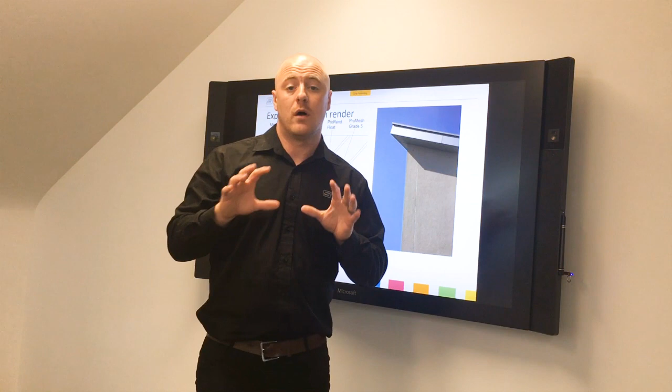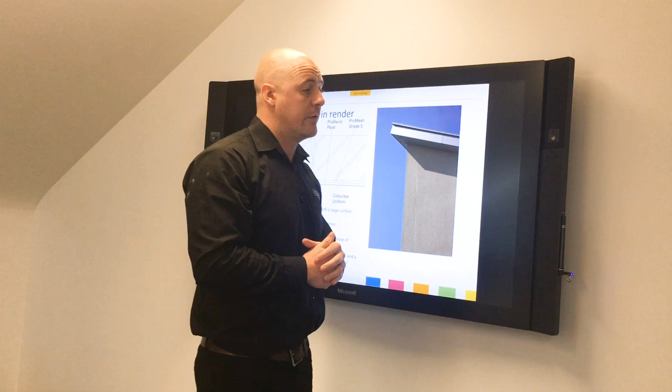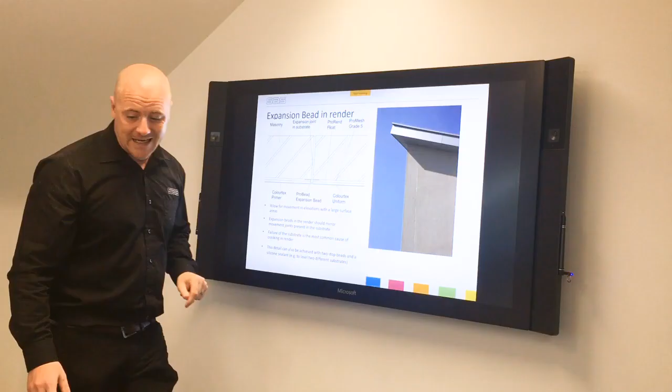So we talk about expansion in render. This is a through wall detail, looking down on the wall, showing our Colourtex Uniform system onto masonry. As you can see, the expansion bead is placed central, usually behind an external masonry skin, you'll see a bit of concrete band and an expansion bead. These are our expansion beads, 3 meters in length, specifically designed to take up lateral movement in an external masonry skin. Mesh is situated in the render, and the placement of these expansion beads is extremely important, and we'll talk a little bit about that later on in this webinar.

So it allows for movement in elevations with large surface areas. Expansion beads in the render should mirror movement joints present in the substrate. Now there is some wiggle room on that - it's not just where the expansion is in the substrate, but the expansion bead can be used just to break the render, and I do get asked that question quite a lot, where there might be a large panel and it'd be easier to break it up as opposed to doing it all at once, because the render might be going off, or it might be too much of a large area for the subcontractors to apply without it curing too quickly. So it can be used as that, or as a detail break.

Failure of the substrate is the most common cause of cracking in the render, and in my experience, I've been working with the company for 7 years. I've seen a lot of cracks in rendered substrates, and nearly 99% of the time I find that it's cracking within the substrate that's emanated through onto the face of the render.

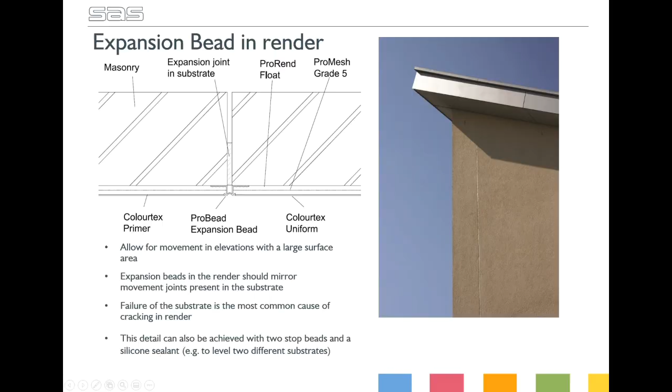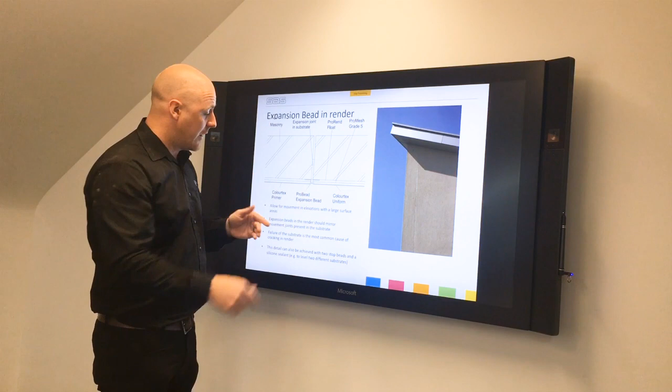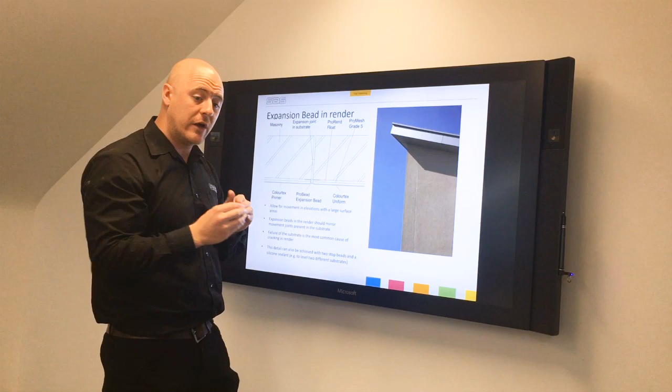This detail can also be achieved with 2 stop beads and a silicone sealant to prevent water ingress. For example, if in this detail you had a masonry substrate on one part and a timber frame substrate with a board system, or they were situated back from one another, you can increase or decrease the thickness with stop beads and render in order for the stop beads to marry up, which is a good way of ensuring there's a flat surface. In some cases, an expansion bead just may not work, so back-to-back stop beads can work just as well.

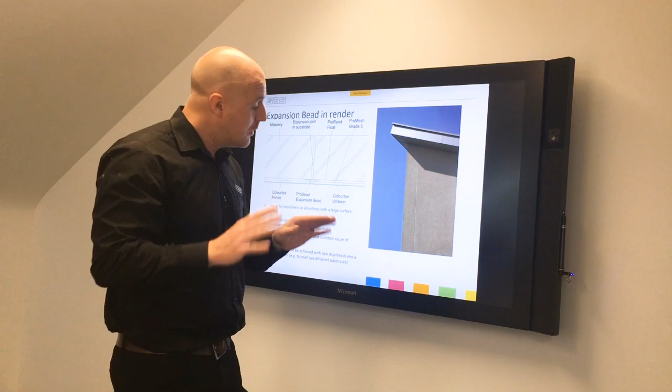Placed over a movement joint present in a substrate to reduce cracking. Use where 2 substrates join to eliminate cracking from differential movement, and we'll discuss differential movement further on. Useful for achieving clean breaks in coloured renders.

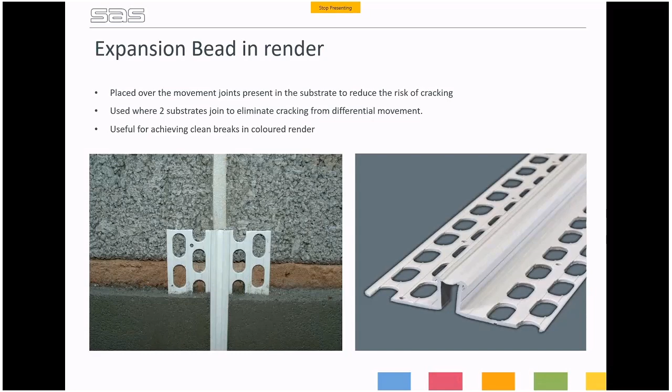This is a picture of our expansion bead. You can see on the bead itself there's a locking point where the render can lock in underneath, and it's keyed on the sides in order for it to really key into the render and prevent any spalling. For example, if you use a monocouche render, there's a nail float that you use to finish it. If you use an expansion bead or a bead which is galvanized, it's liable to rust and also spall once you scrape it back. Ours are 100% UPVC and they're also non-flammable.

For dense concrete block, it's recommended that the expansion bead is placed every 7.5 to 9 metres according to the NHBC standard. Now, that's not set in stone. There are different block types and different manufacturers that produce the blocks, so it's always worth checking with the block manufacturer for expansion bead placement. They'll be able to give you the specification on the blocks, so it's not always what's said in the NHBC standard that's correct. There are different densities of blocks and bricks as well, and that can decrease or increase the expansion placements.

Expect to see expansion bead where a wall changes in height, and that is the big one, regardless of the specification of the block. As you can see in this photo, this wall is about 15 metres long. There was a crack situated further along because they didn't introduce a vertical expansion, and as you can see here, where this parapet wall detail ends and the wall increases in height, there's a crack that runs down there. So this is where the expansion bead should have been situated. This would have saved this particular wall. And also further along, this was...

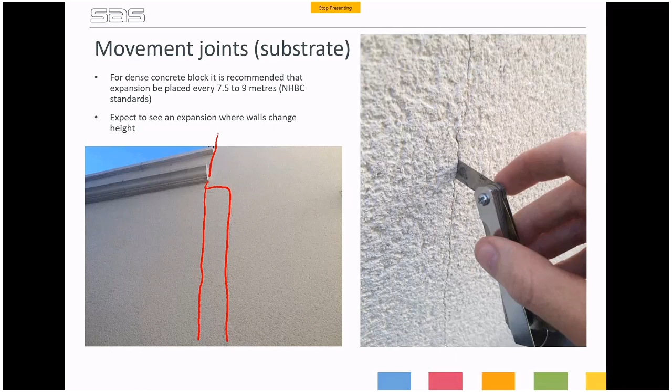...a 7.3 Newton concrete block, so again roughly about 7.5 to 9 metres - there should have been another expansion bead, but there wasn't. The way I always check on site if it's cracked, not only in the render but in the substrate, is I use a feeler gauge, one of my best tools in order to check cracking.

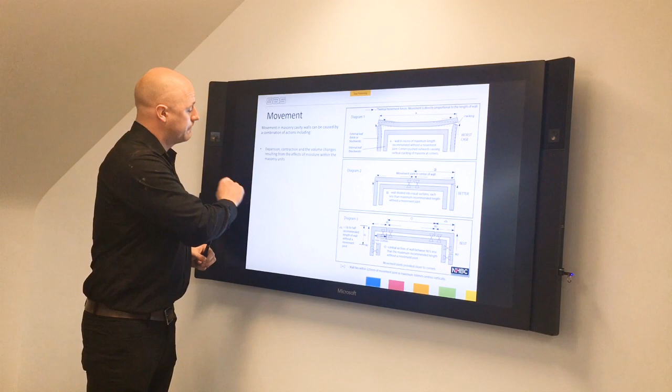Movement in masonry cavity walls can be caused by a combination of actions including expansion, contraction and volume changes resulting from the effects of moisture within the masonry units, and that's a very common one I see. When it comes to blockwork, it's a porous material. It will take on water content when they're stacked on site if they're not covered, and also once they're laid into the masonry skin under inclement weather.

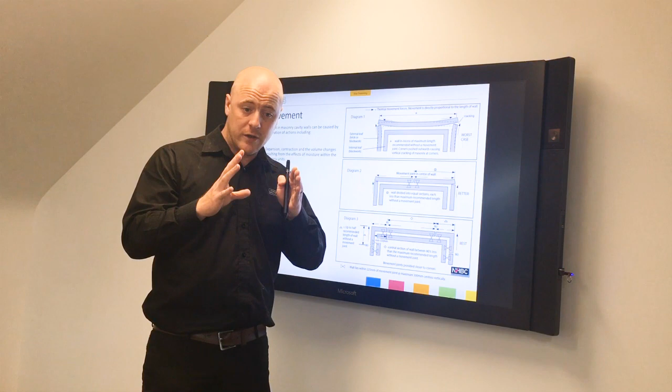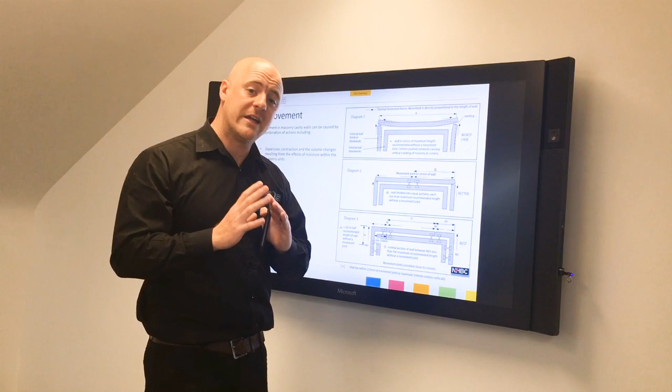They will absorb moisture. Now, if those moisture levels reach 12% moisture content by volume of the block, it must be released prior to rendering. The reason for that is if you render over a saturated block, once the moisture content releases through the render, the blocks will actually decrease in size, and that's called shrinkage. So shrinkage cracks are what I commonly see on rendered elevations.

Temperature variations - mostly you always find that on a southern facing wall, or a wall that gets the most sun, there's higher thermal movement at play because there's much more heat acting on that surface. So under cooling it decreases in size, and it increases in size once it's heated up. That's a lot of thermal movement.

The size and shape of the masonry panels, as well as the distribution of openings and restraints, matters too - the more openings you've got, the more chance of cracking, as it decreases the strength of the overall elevation. Movement joints should be properly constructed to cater for the calculated degree of movement. This is generally undertaken by a structural engineer in the design process.

Let's go back to that slide. Thermal movement and the forces are directly proportional to the length of wall. So this is, say for example, a gable end of a property. There's no expansion in this first detail, so the thermal movement acts on the wall by pushing the external corners out. If there's no expansion bead central, there's a high chance you'll get cracking on these corners. An introduction of an expansion bead central will reduce the risk of cracking on the external corners, but it will not stop it.

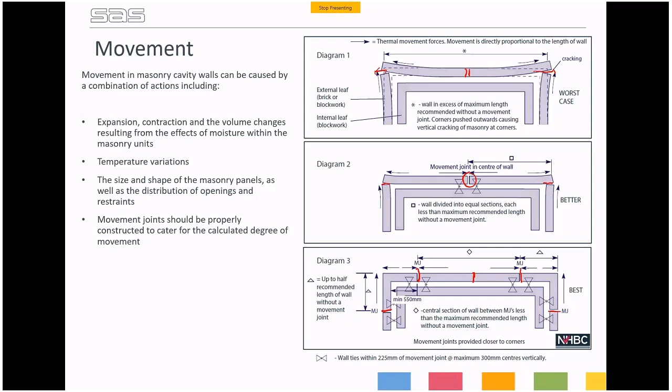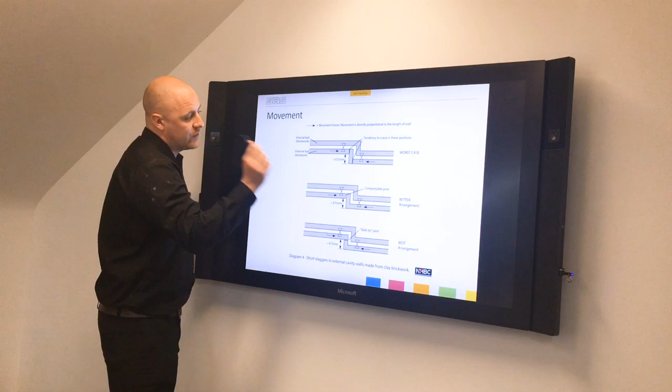Thermal movement forces are proportionate to the length of wall. This is the external leaf, and this is an internal corner. So you've got forces acting on the wall this way and that way. As you can tell from the drawing, you're likely to get a crack here and a crack here if you do not insert an expansion bead detail.

Inserting an expansion bead here with a compressible joint behind is better. But acting this way, if it breaches that compressible joint and expansion detail, there's still a possibility of a crack there. So the best way in this arrangement to actually put the expansion bead in would be at this point here, so the external masonry skin can move in and out of one another without cracking the external render.

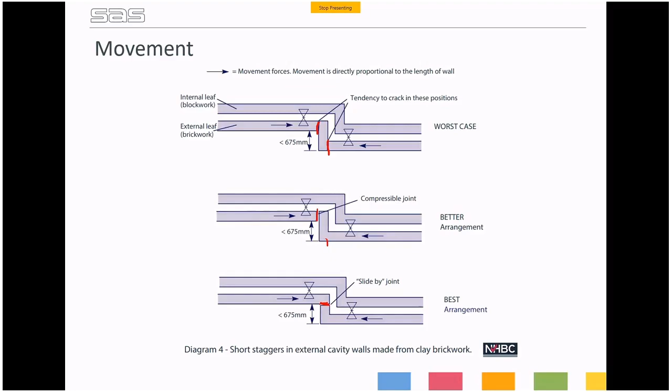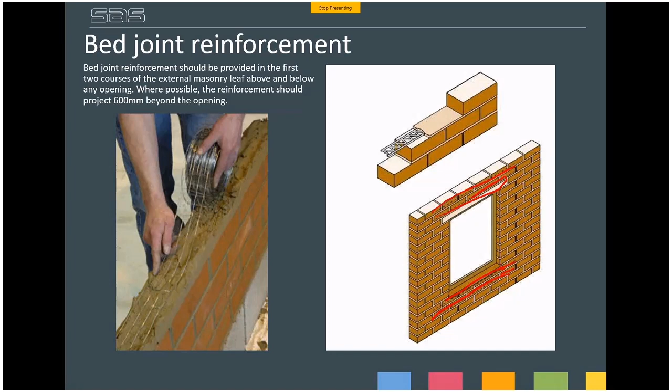Bed joint reinforcement, not only just around the windows but in the external skin of the masonry wall, can also increase your expansion bead placement. So if you put it in every mortar joint, bed joint, every one or two courses, it will increase the strength of the wall and further increase your expansion placement. Again, that would be down to the structural engineer to assess.

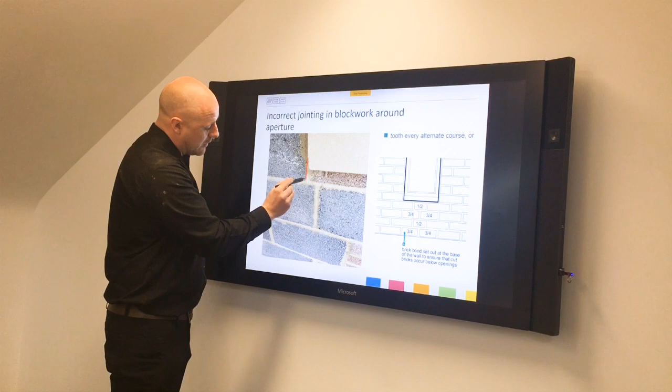Incorrect jointing in blockwork around the aperture. This is a photo I've taken on site. This is the window sill, and you can see that straight joint running right the way down there, and there's a straight joint there. But even prior to any rendering, you can see that is cracked. So if I put render onto that, it will emanate through the render. There's no two ways about it. So this had to be taken out and relaid in order for it to comply with proper jointing.

There should be a block central to the window, and this reveal line should not fall in line with the joint underneath it. Everything should be bonded correctly: half in the middle, two and three-quarters, another half, and two and three-quarters. That's the best way of doing it, and it prevents any cracking around windows.

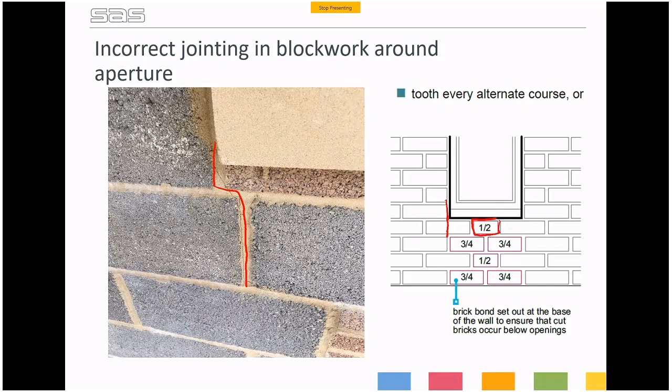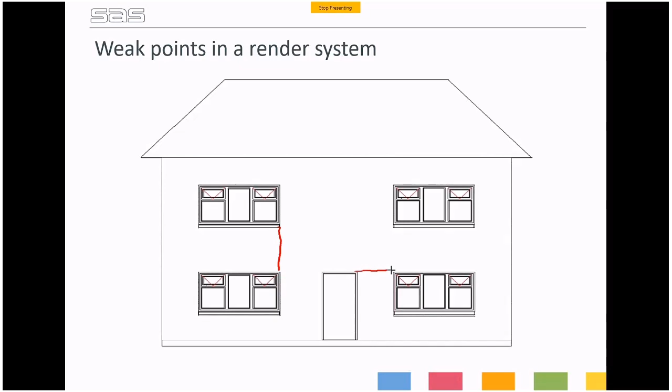Lintel to lintel, you do get a lot of thermal movement with the lintels as well. You do see cracking from there to there, spurring off from the doors. A lot of the time it's because of no bed joint reinforcement.

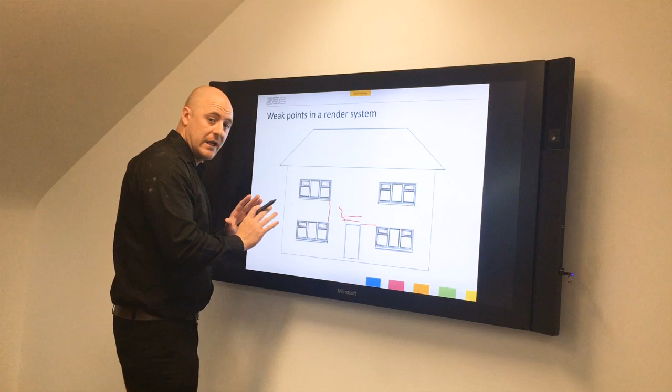With regards to the render, our specification would be to fully mesh the elevation in glass fibre reinforcement mesh, and additionally 300 by 300 minimum patches on all 4 corners. That prevents any cracking that can occur within the render, providing that the masonry substrate has been constructed correctly.

You may also see cracking on the external corners if you don't insert an expansion bead on the external corners, and potentially one central as well. But when inserting expansion beads, it's imperative not to put it over or through any apertures. It must be situated away from the apertures and not be broken.

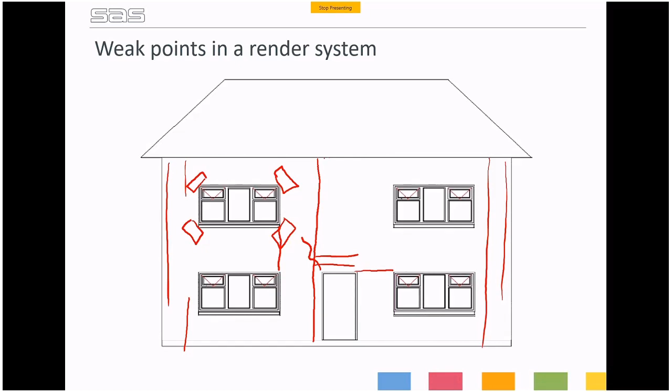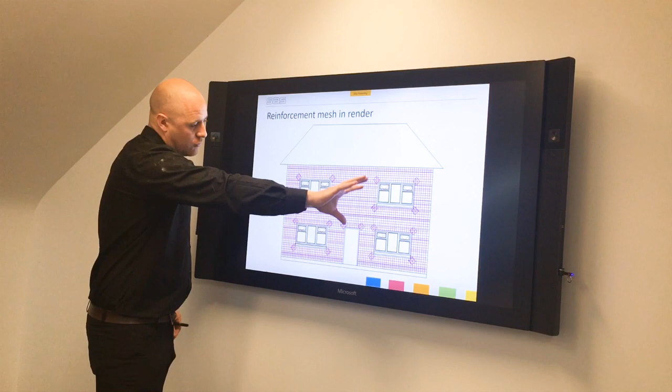Very important. So this is a common detail of what our mesh would be in the substrate. As you can see, the mesh is all running that way. It doesn't matter if it goes vertically or horizontally. The key is to make sure that the mesh is overlapped.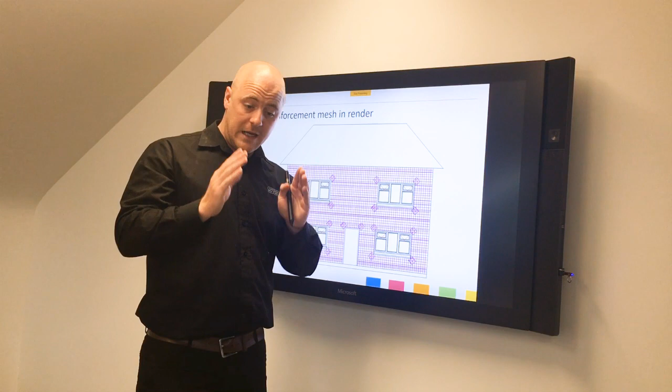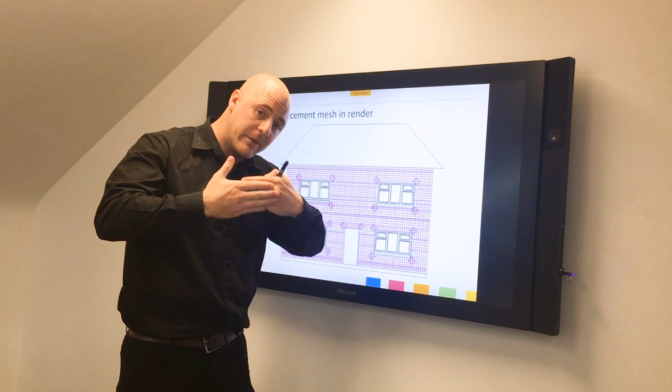Usually what you find on glass fibre reinforcement mesh is there's a 100mm overlap line. If you fail to do the overlap and leave the mesh just adjacent to one another, then under curing it can actually split the render, because it's pulling on the render in 2 different directions. So the overlap is very important. Must be made sure that it's overlapped.

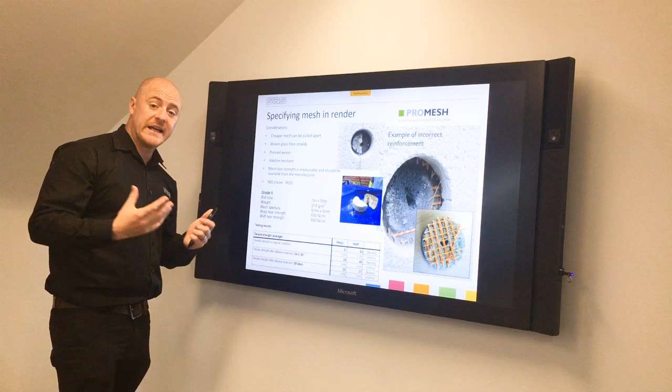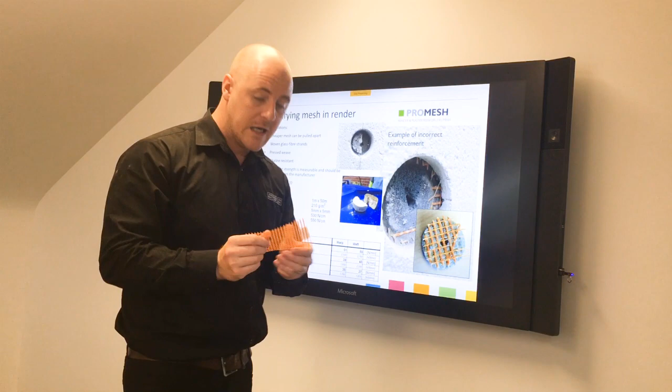So specifying mesh in render - what are the considerations? The cheaper mesh can be pulled apart. This is our grade 5 mesh, for example, the one that we would put in our Cottages system or any render system on a masonry substrate. As you can see with this mesh, it's physically impossible to break that apart. Now, with cheaper meshes on the market, you will find that you can pull apart those apertures in the mesh, which really highlights the fact that it's a cheaper mesh.

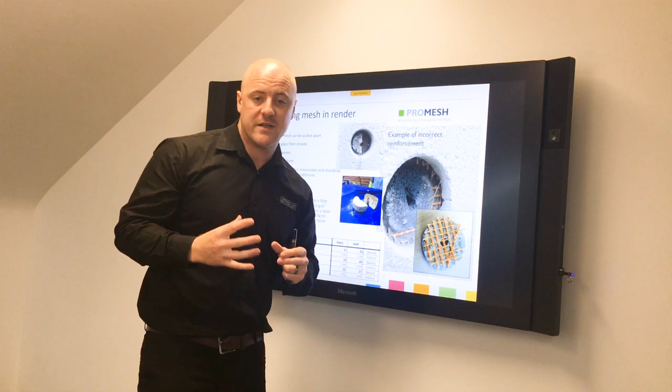It's woven glass fibre strands, pressed, weaved, and this is the big one - alkaline resistant. A cheap mesh you might get on eBay, for example, from China, is very unlikely to have an alkaline resistant coating. Cement contains alkaline, and it's the alkaline that actually breaks down the mesh. So if you use a cheap mesh in the render, which is high in cement content, it's likely that it will break down and cause the cracking issues further down the line.

It might be quick, or it might be a year later. Very difficult to tell, but it will crack it eventually. So using a strong alkaline resistant mesh is what you would need.

Below here, you will see this is our E-tag testing that we've done on our mesh. They laid the mesh in an alkaline solution, like a bath. You can see from the tensile strength in the original condition, the warp and weft strength is 51 and 55 newtons per millimetre. Now, the tensile strength after the alkaline treatment for 24 hours, it only dropped to about 39 warp and 45 weft, which is still very good.

And the tensile strength after the alkaline treatment, after 28 days, so it's been sat in there for a very long time, only went down to 35 to 37. It just highlights the quality of the mesh that we actually put into our render systems. So the mesh tear strength is measurable and should be available from each manufacturer, and you will find it in the NBS clause M20.

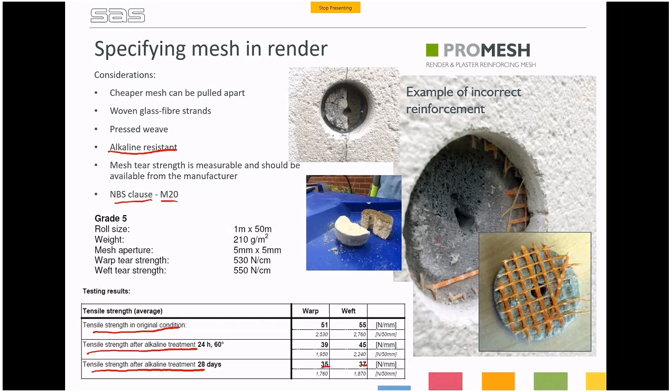Mesh placement is also incredibly important. So we look at these two examples here. Now this is a thermalite block, and you can see that the mesh is placed at the back of the render. That's not actually doing anything to strengthen the render at all - all it's doing is impeding the bond from the render to the wall itself. So it's very important that this mesh should really be situated in the central part of the render to offer its strength.

And obviously in this detail, as you can see in this picture, there is no mesh at all - it's completely null and void of any mesh. But in this picture where I've taken the core sample from, you'll see that there's cracking that runs all the way through the substrate and into the render as well.

Now, I'm not saying for a minute that if it did have mesh in the render, then it would prevent that crack, because ultimately, if there's severe enough cracking in the substrate for any reason - shrinkage, movement, settlement, or a structural issue - the glass fibre mesh is not going to hold the render together, and that's a really important one to bear in mind.

But it may have helped.

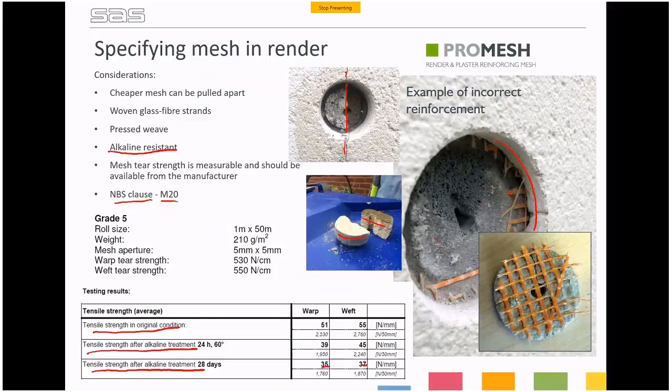Differential movement is if you've got blockwork or brickwork, for example, a brickwork structure with blockwork windows laid in, and you want to render over the top. The issue is that they're two different densities - brickwork being a high density material, and blockwork being a lower density material. So they will move differently to one another.

So what do you do? Not a lot you can do. If you've laid it like that and you render over it with a proprietary base coat, for example, and fully mesh it, you can even additionally put mesh over those areas where the two blocks meet. It still may not prevent the cracking from occurring.

Potentially you could use, in this instance, a board system where you batten it all off and then board it. That would prevent the cracking. But if you're going to render direct, there's a good chance that it would crack.

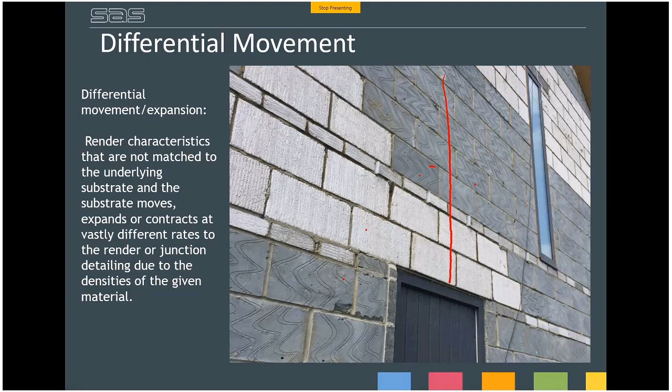Let's talk about hydration cracking. Hydration can affect the render application and curing, and some factors include crazing caused by the render drying out too quickly due to the weather conditions.

Crazing can happen if you apply render onto a thermalite block without a proprietary base coat to control suction. It can also happen if the sun's directly shining on the render for too long, or if drying winds affect it.

Once the render is applied to the wall, it immediately starts to release the water content in the render itself. If it's released too fast under the hydration process, it will craze at the front face of the elevation. It doesn't necessarily mean it's detrimental to the render or its integrity - it just means it's more aesthetically unpleasing.

You'll only find that crazing cracks occur once the render actually experiences inclement weather, because those very fine cracks, less than 1 millimeter in width, will trap water, and you get this crazing effect.

To get over this, generally you can just paint it. But as you'll see in the next couple of slides, overhydration or underhydration of the render can also lead to debonding issues.

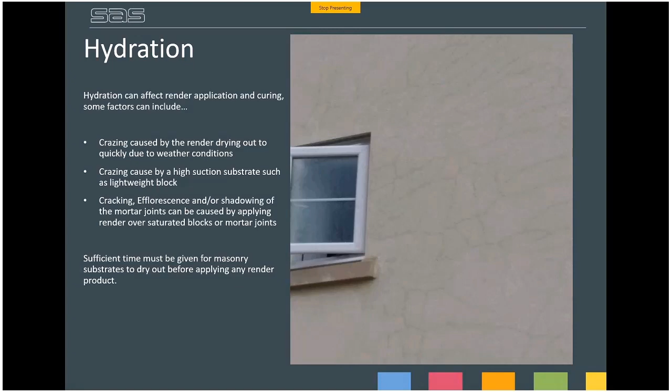Cracking due to insufficient bond. Brickwork is a high density substrate, and it's got a low suction rate. The common density with brickwork is around 1900 to 2100 kilograms per meter cubed.

This means that a pre-treatment would need to be applied prior to rendering. So the more dense something is, like concrete or brickwork, the less it's going to actually adhere or bond to the render itself.

So a proprietary render, we've got one called Prep, which you can apply at 5 mil over the concrete or brickwork first, and let it cure to actually create a key for the following render coat.

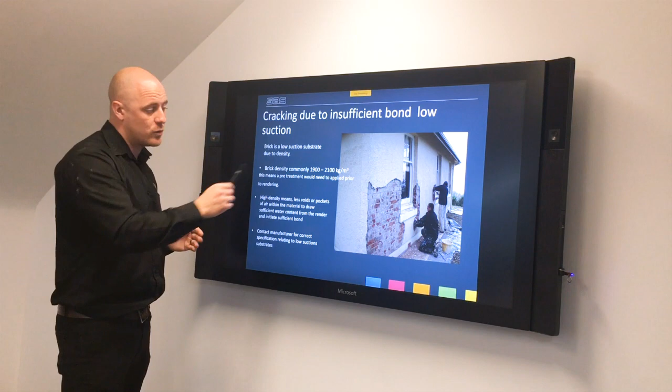So this is what we would specify on a brickwork or concrete substrate. Contact the manufacturer for specifications relating to low suction substrates, of course.

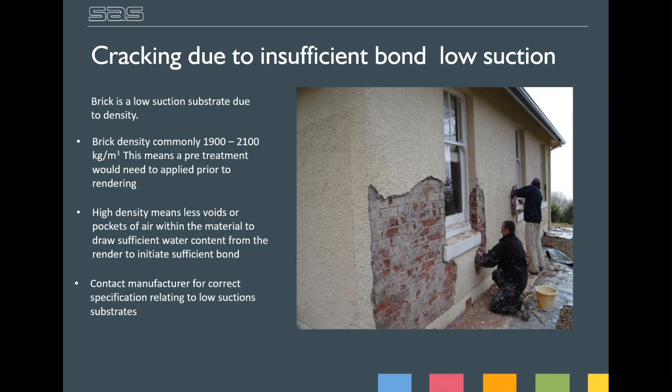Cracking due to insufficient bond on high suction substrates is often caused by hydration issues, where the render cures too quickly, as we discussed previously, resulting in a weak bond to the substrate. Sometimes this hydration issue may only cause slight crazing on the surface, but if it's overhydrated too fast, it can physically create a problem with debonding.

As you can see in this photo, this is a thermalite block with a sand and cement render, and the overhydration of the render has actually caused it to release from the substrate itself. It's very likely they didn't use an SBR or any proprietary suction control. The aircrete blocks have a density of roughly 400 to 900 kilograms per meter cubed, meaning there are more pockets of air or voids in the material that draw too much water from the render, both inside and outside, which again affects the bond.

That's one of the main problems when applying render - incorrect specification of material use, applied again to an insufficient depth.

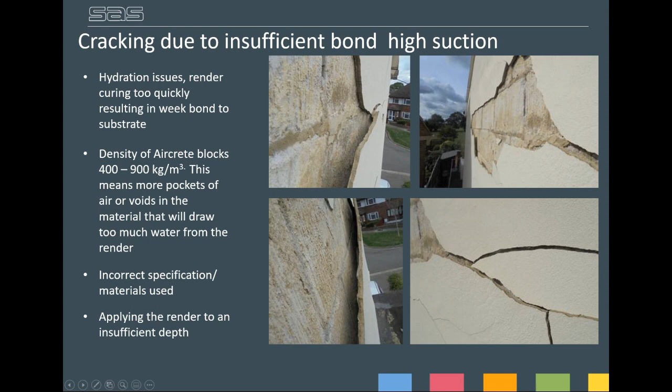This is a case study of Bellevue Cottages in Bristol, which I undertook for the NHBC. This is a metal lath system with a sand and cement render. With the lath system, you'll see that it's battened off, with building paper and mesh lath. Now the issue with lath, and on timber, is that timber frame is a hygroscopic material.

It will take on water and release water in different environments. So if you apply a render to the lath system which is high in cement content - which sand and cement is - and not flexible, with no polymers allowing for flexibility, you will have cracking that occurs because the frame will move. That's what you can see in this particular instance - cracking from the windows here, running all the way down.

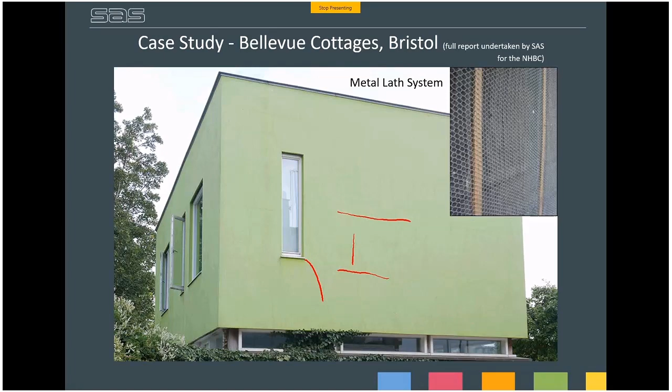So this all has to be removed in order for it to be rectified. For this, we used our Pro Wall system. This is a through-section detail of the actual lath system. You can see the building paper down here and here, and you get your metal lath here, and this is your sand and cement product.

This is the original paint, which is a lime green, as you can see on the surface. Now what they've done, rather than remove the system and put a correct one on, is used another flexible render over the top with a glass fiber mesh embedded into it, hoping that would cure it, but it hasn't. The cracking and movement of the timber frame came through onto the face of the flexible render as well.

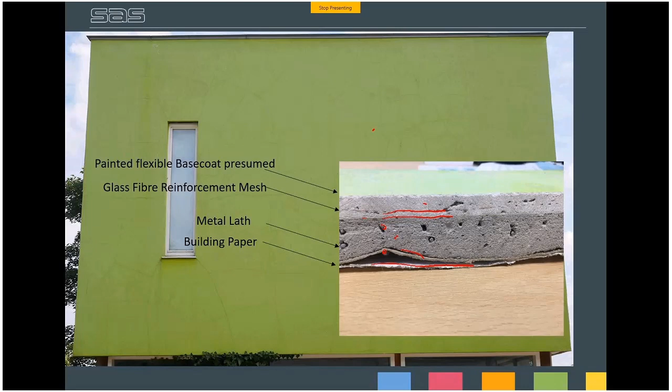So with regards to specification for timber frame, it's always best to contact the manufacturer and get some idea of what they can use on a timber frame. We recommend a board system. Now, onto cracking in timber frame.

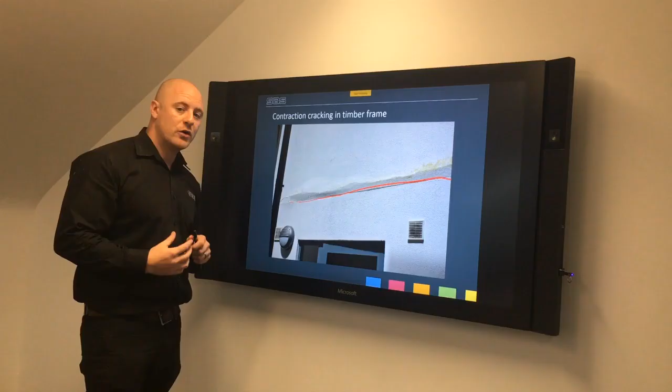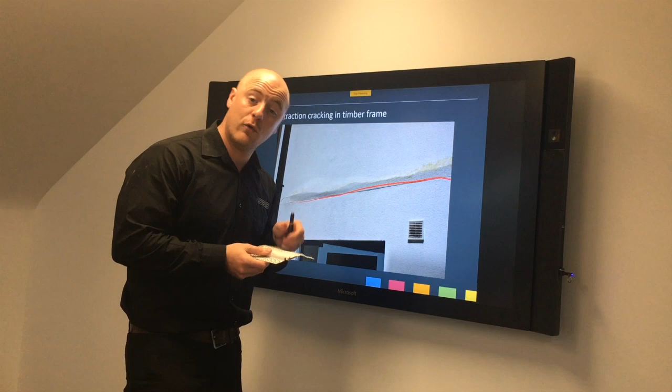As you can see here, this is a floor joist zone or rim beam. At the rim beam area, you will require something called a slip joint. A slip joint is put central to the rim beam area, and it helps with shrinkage or contraction that happens naturally at floor level in a timber frame - I'll explain why in a minute.

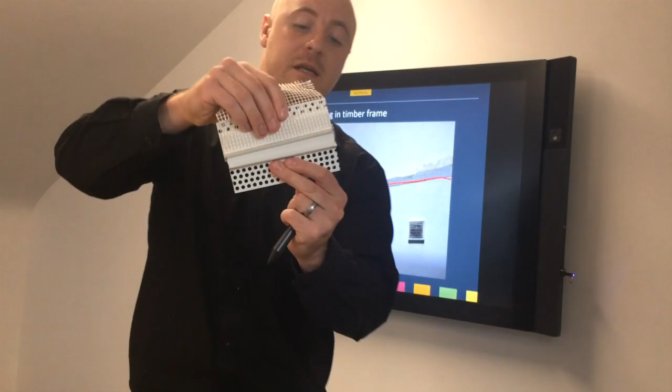With this slip joint detail, I'll come closer to the camera - there's movement in the bead itself. Now, as you can see in this one, this hasn't happened. This is a back-to-back stop bead, which shouldn't work in this case, and it hasn't. The contraction has happened within the frame, and it's cracked ultimately.

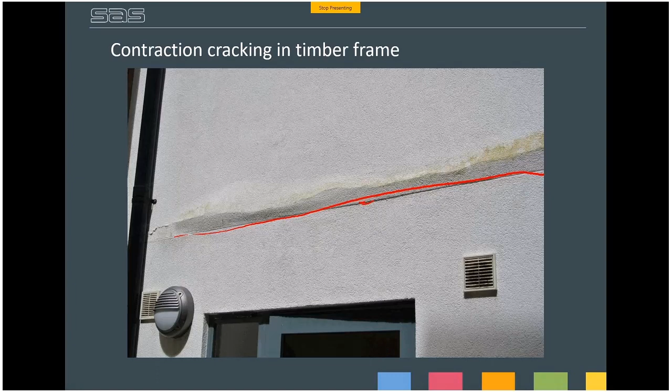And this is another picture which shows it very well. You can see all the floor levels here, and you've got cracking. Now this is a timber frame board system, and they obviously didn't apply it to specification, and that's the end result.

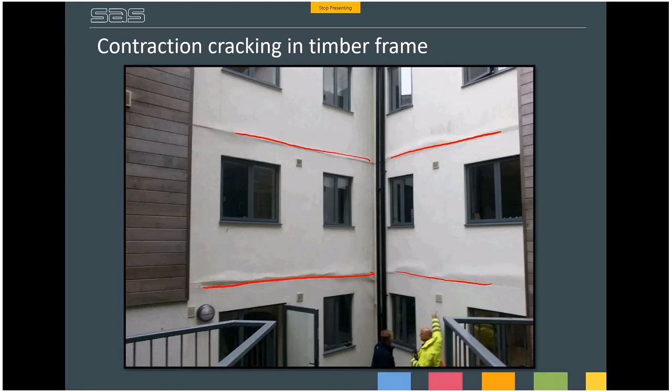So why does it move? The rim board area, or the floor plate, usually has a makeup of timber, all stacked horizontally, and those timbers have moisture content within them. As more people live in the timber frame structure and warm it up, the moisture content in the capillaries of these cross-grain timbers releases, causing cross-grain contraction that pulls down and shrinks these timbers.

So this is why you need the slip joint detail on the outside of the system. That actually saves it. What happens with the battens is they sail over that area and they're not screwed into the rim beam, and the board system is screwed to the battens itself. That prevents any cracking within a render system on a timber frame. It's very important, so they will go in at every floor zone.

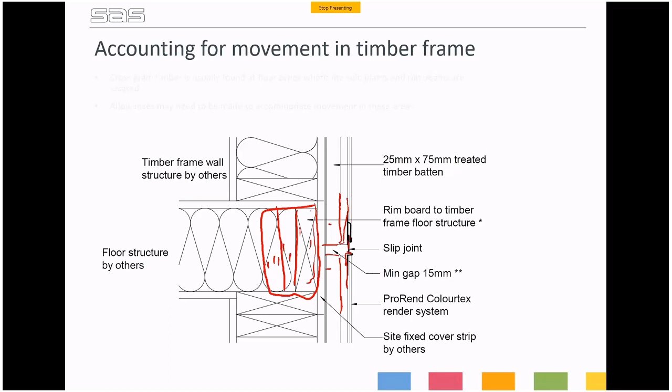Here are some drawing details of the slip joint system and where it's situated within the timber frame and on the system. Vertical expansion within the system is handled with just a normal expansion bead.

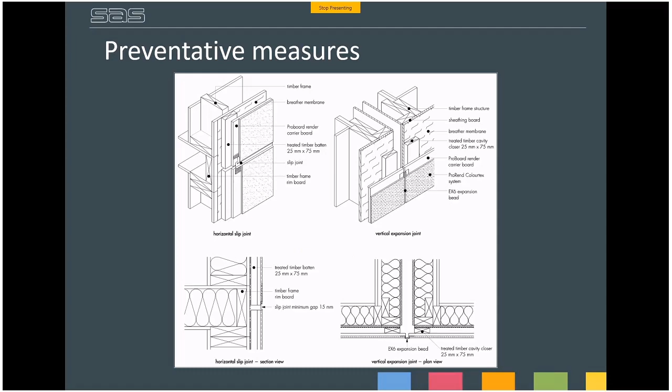The render applied to the system is a very thin, high polymer modified base coat - ours is called Light - and a silicate resin top coat called Colourtex. The full system looks like this: you've got your board system, a glass fibre reinforcement mesh, primer and top coat. All in all, it's a crack-free system, especially when you incorporate the slip joint detail.

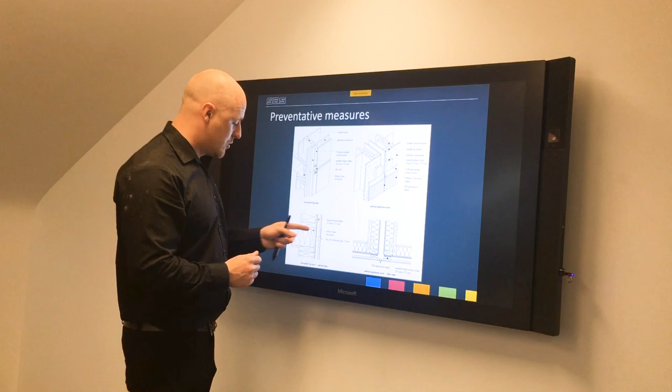Cracking in and around windows - again, we would create an L-shaped detail over the window. We wouldn't have any horizontal or vertical joints there, which prevents cracking from occurring around the window area, as it's a high concentration point for cracking. Again, this is an EWI system, with an L shape and no vertical or horizontal cracks or joints.

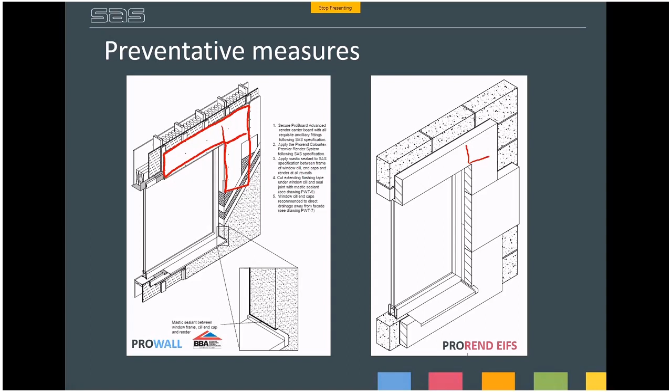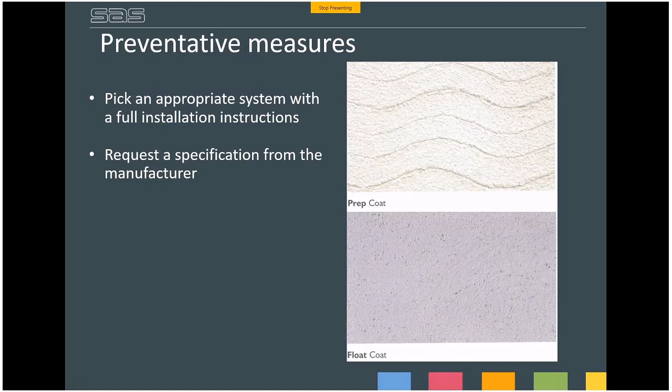Hope that makes sense. So, preventative measures - what can we do to prevent cracking from occurring? Pick an appropriate system with full installation instructions or specification. That's the most important thing to remember when thinking about what render system to use on a particular project. Request a specification from the manufacturer, and if they can't give you one, don't use them. There should also be a guarantee.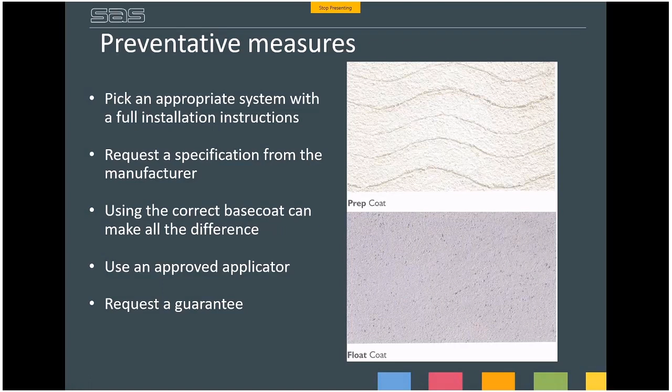Using the correct base coat can make all the difference. Use an approved applicator - that's one of the main important things, someone who's been through a training course or knows how to use the products you specify on your particular project. Again, request a guarantee. All pre-batch manufactured products come with a guarantee, usually 10 years, though it may vary from manufacturer to manufacturer - ours is 10 years. Again, it must be applied by an approved contractor.

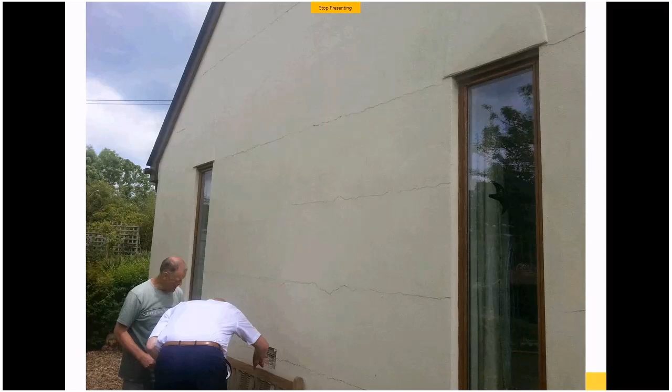Using the wrong system - as you can see in this photo, this is again a rib lath system, similar to what was on the NHBC case study but slightly different. It's actually a ribbed lath system, and where those ribs are, you can see horizontal cracking running right the way through it. There's also a bit of moss growing on there. As you can see, where the crack runs along, it follows the scratch coat in the rib lath system.

Obviously, with the movement in the timber frame, there's also probably a lot of thermal movement acting on this elevation. That was a south-facing side, so you get a lot of thermal movement within the metal itself. That's why the cracking has occurred on this particular project.

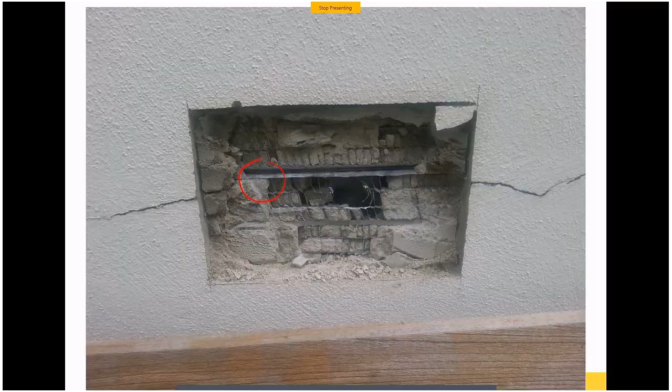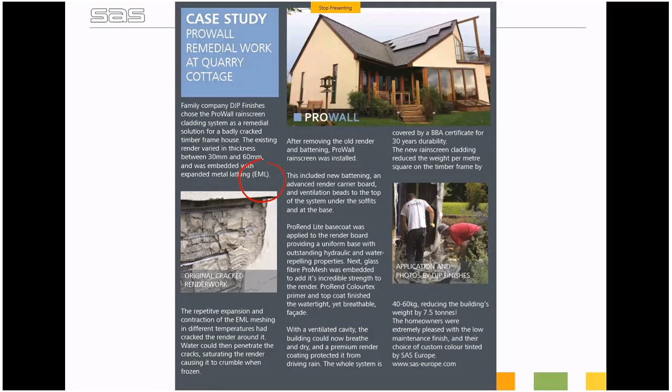So what did we do? We removed all the rib lath system - it was about 7.5 tons of sand, cement render and rib lath system taken away from that timber frame project, an incredible amount of weight for an external facade. Our Pro Wall system is about 28 kilos per square metre, so it's a very lightweight, flexible system.

So this is what we did - we removed it, put our Pro Wall system on there, and as you can see, the end result looked very nice.